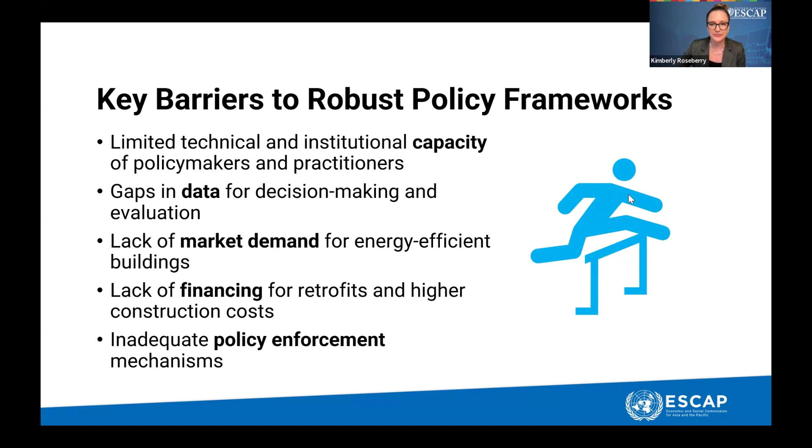Some of the implementation pathways that we see that are particularly important include, first of all, awareness. This is really important as policymakers, practitioners, building occupants, home buyers, etc. must be able to value energy efficiency for the benefits that it delivers, whether it's achievement of national greenhouse gas emission target reductions or lower energy bills in the home. There must be demand for building energy efficiency.

Institutional capacity needs to be improved in order to develop and enforce regulations that are appropriate for the local context. You can't just copy and paste from one context to another. These regulations really need to be tailored to the local context. A long-term perspective on building energy codes is important in order to continuously increase the ambition of the regulations toward the eventual net zero targets. And of course, a key component of these roadmaps for building energy codes includes MRV frameworks.

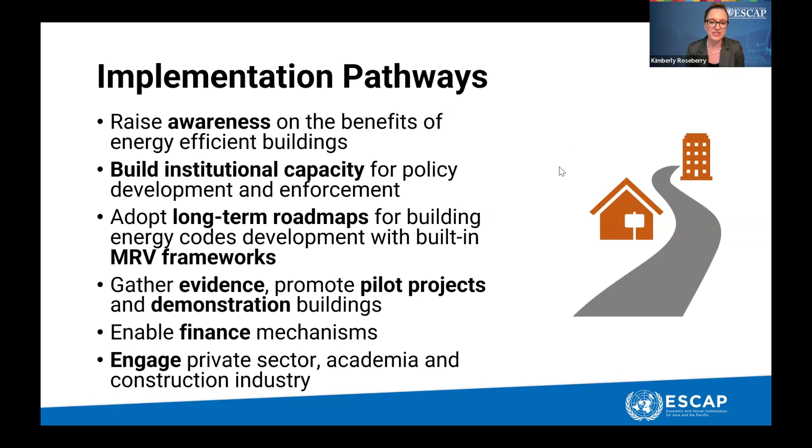Piloting and demonstrating various methods or approaches, design approaches, materials can help raise awareness while also providing data and evidence that can feed into strengthening regulations. Of course, finance mechanisms are important, and lastly, engagement amongst stakeholders, because there are many players that contribute to the realization of energy efficient buildings across private sector, academia, construction industry, as well as government.

When we think about evaluating building sector policies, we need to start with performance baselines. And what we've seen in some contexts where we're working is that those don't actually exist. So there's a real need for energy audits and benchmarking of buildings across different typologies according to their usage, differentiated by climate zones, etc. Really understanding the existing built environment is critical. And then you can get into some modeling of that building stock and begin to understand what the potential impacts are of various regulatory interventions.

Another key component is survey evidence on user behavior and comfort, understanding your market and for the private sector, understanding user behavior. It's possible a building performs really well, but is very uncomfortable to actually live or work in. I think back to the 1970s in the US, where there was a big push during the oil crisis to make buildings energy efficient. So all the windows were shrunk, and there was no daylight in those buildings anymore. Not very comfortable buildings or productive spaces to be in.

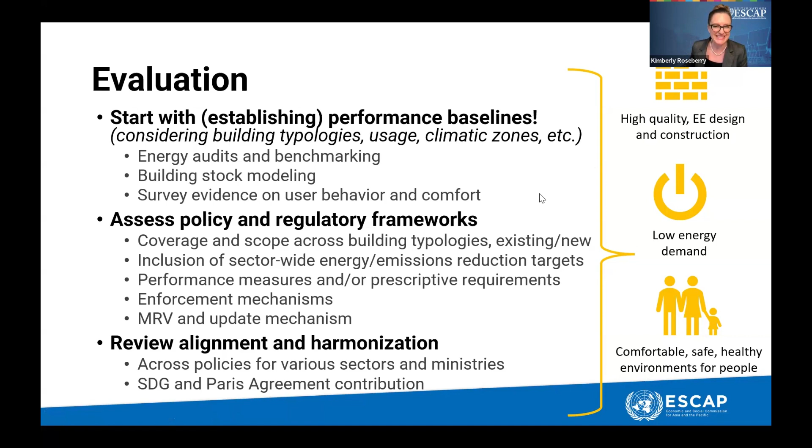So hopefully I have enough time here to go quickly into our Cambodia case.

We're working with the Ministry of Environment there and UNEP as our partners, and we're collaborating on a passive cooling project. In Cambodia, what we see is rising building energy demand, and cooling is really driving that.

The nation has set some targets under its National Energy Efficiency Policy, as well as in its NDCs, on reducing energy demand in this sector, but they still have no building energy codes and no MEPS for appliances yet. These are in the works and are expected to be released soon, but they don't have those basic regulations in place yet. They also have a real lack of an evidence base to inform their regulations, whether it be demonstrations or pilot projects.

There's very few. We are one of those pilot demonstrations, and I'll talk about that quickly.

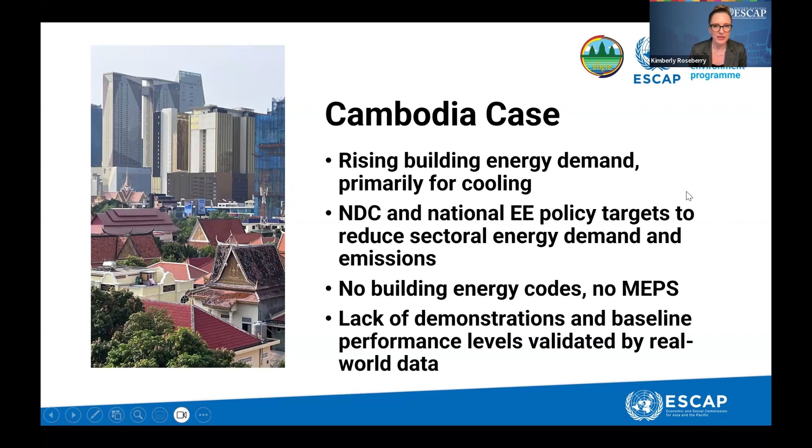But first, in Cambodia, what we really started with was a review and analysis of the built environment, looking at the building typologies, and really modeling out what their performance was based on standard construction practice in the country, and provided an analysis of passive cooling.

When we say passive cooling, we're talking about passive design used in the architectural design and in the construction of the building to reduce the cooling load of those buildings. So looking at that and understanding what the potential is for regulations to improve energy efficiency, reduce energy demand and emissions.

We've developed some very practical tools, first being the compendium. We've really surveyed the materials that are available on the market, the practices that are applicable for the Cambodian context, and pulled them together under this compendium.

We've also created an illustrated guidebook introducing the principles of passive cooling to architects, engineers, and those practitioners who want to integrate passive design into their building projects. These will soon be available on a website that's soon to be launched, and we're excited to put that material out there to the world.

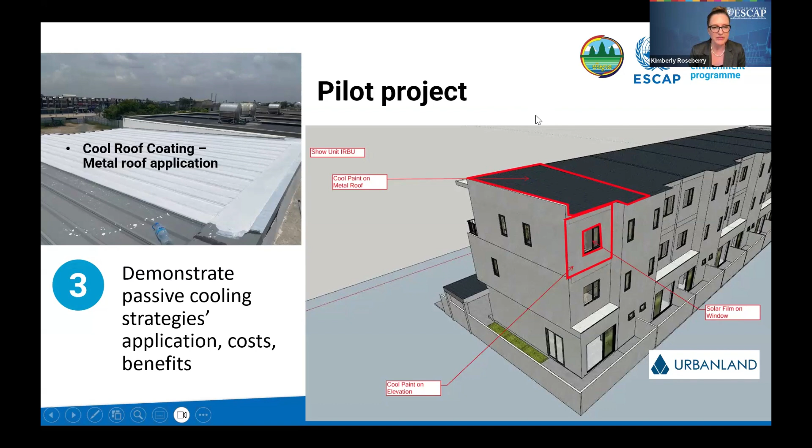to reduce cooling loads. So here you can see cool roof coatings. We've installed monitors and meters to measure the impact, the real world impact of these interventions. By working with a private sector partner, we're really also beginning to capture a lot of information around the practicality of these applications, the cost not only of the materials but of installation, and the benefits of these approaches.

Here's just some more images of that. As I mentioned before, baseline data is critical, and so we have long-term monitoring of the baseline building as well as intervention building to really capture impact.

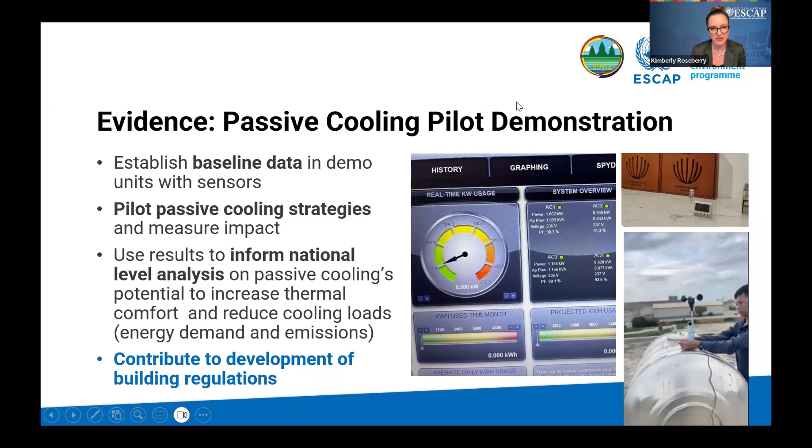Ultimately, what we're looking at is informing national level analysis on the potential of passive design to reduce energy demand and emissions. This data evidence base from across our project will contribute to the development of building regulations in Cambodia. I believe that's it from my side. Thank you so much for your time.

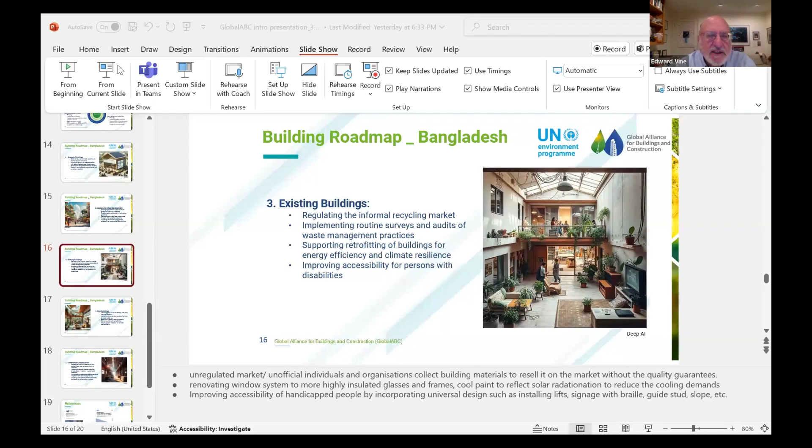So before going on, I would like to introduce the next speaker, Gennai Kamata. He's a technical expert on sustainable buildings in the UN Environment Program. He works for UNEP-led Global Alliance for Buildings and Construction and the UNEP-led Cool Coalition to advocate for energy efficient, resilient buildings. He also coordinates the International Passive Cooling Working Group to promote knowledge exchange on passive design to support enhancing policy, finance mechanisms, and design technologies.

So Gennai, go ahead. Yes, thanks, Edward, and thank you everyone for joining this webinar. I'm really happy to present our work today. My name is Gennai Kamata. I work for UNEP and Global Alliance for Buildings and Construction, or Global ABC, and also the Cool Coalition. Today, I'd like to talk about the Global ABC building roadmap, focusing on Asian context.

Before deep diving into the building roadmap, let me briefly explain Global ABC. This was launched at COP21, hosted by UNEP, and we currently have 339 members, including 68 countries. We are the global platform where all building sectors convene to discuss and share knowledge and best practices, aiming for a common vision of zero emission, efficient, and resilient buildings and construction sectors.

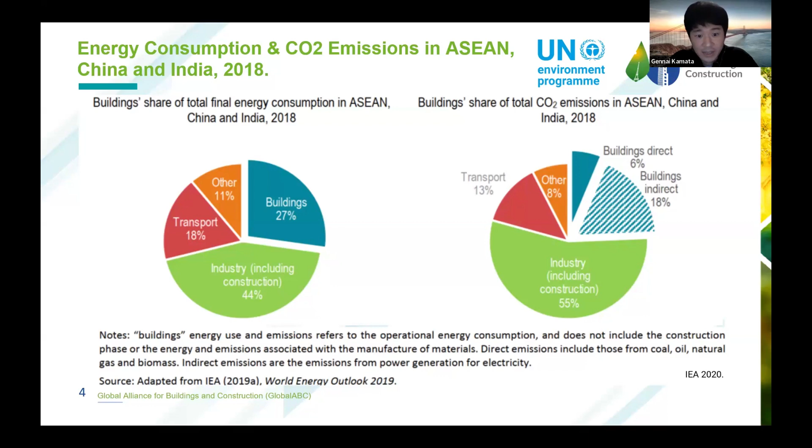Let me talk about the Global ABC Building Roadmap. This is our important publication, developed through consultation with over 700 experts across the world. We need to involve so many experts because building sectors are very fragmented, involving many actors such as developers, architects, engineers, manufacturers, contractors, and building operators. We need to listen to their voices and bring them together around a common vision to achieve building decarbonization.

So this is a guideline for how these players can decarbonize the sector. This Global ABC Roadmap has already been adopted by many countries across the world, especially developing countries.

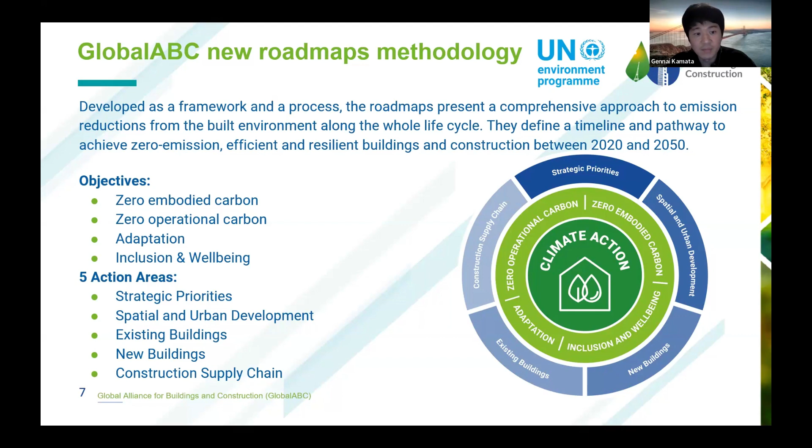This is the Global ABC Roadmap methodology. It was revamped last year, so this is a new methodology capturing the important topics we are lately discussing. In this methodology, countries are encouraged to look at 4 objectives: zero embodied carbon, zero operational carbon, adaptation, and inclusion and well-being. To achieve these objectives, 5 action areas are encouraged: strategic priorities, spatial and urban development, existing buildings, new buildings, and construction supply chain.

This is a little abstract, so in order to efficiently deliver these guidelines, we also prepared a step-by-step guide, which explains how to set goals, identify key actions, and create a pathway towards more efficient, low-carbon, resilient, and inclusive buildings and construction sectors.

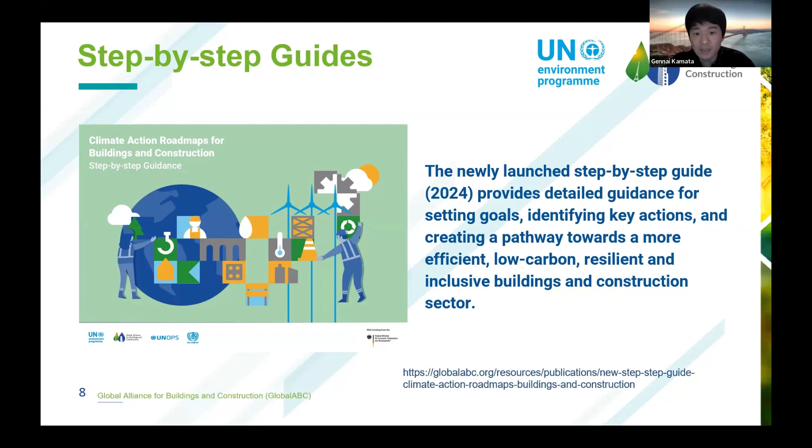We also do a baseline assessment to identify the country's condition in the building sector. Then we identify challenges and opportunities, prioritize domains of change, develop actions, and set up implementation, monitoring, and evaluation.

We also prepared a Gantt chart for countries to understand what they need to do, with what timelines, and by what time they need to engage with whom. This Gantt chart gives countries a more detailed breakdown of the activities they need to do under each step.

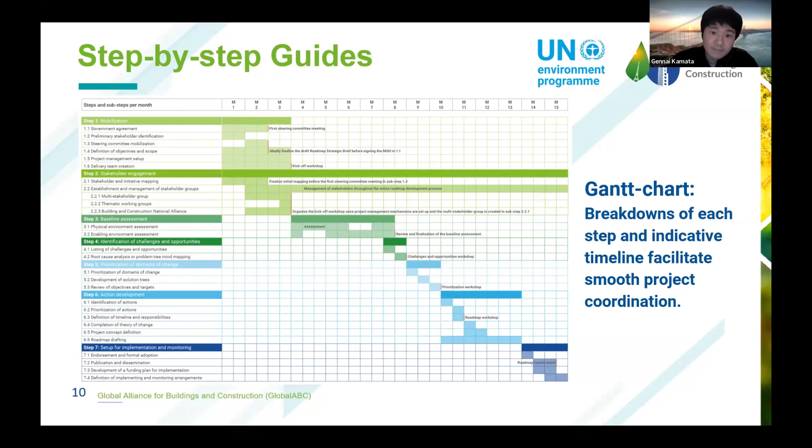When it comes to the evaluations, it's important that we look at the situation from a variety of perspectives, especially for the building sectors.

Basically, I would say we have 5 areas that we need to look at. First of all, technical progress, which is about the energy efficiency of buildings - for example, energy use intensity per square meter, how much it can be reduced from conventional buildings. And also material efficiency, which means how much we can decarbonize the building materials and its production process.

When it comes to policy advancement, we can evaluate whether countries update or develop building codes. In most countries, they already have building codes, but not building energy codes, as Kim mentioned in her slides. Normally those building codes include safety measures such as structural durability and fire safety, but they never talk about energy efficiency and environmental aspects. That's why they need to incorporate that aspect into building codes, regulations, and standards.

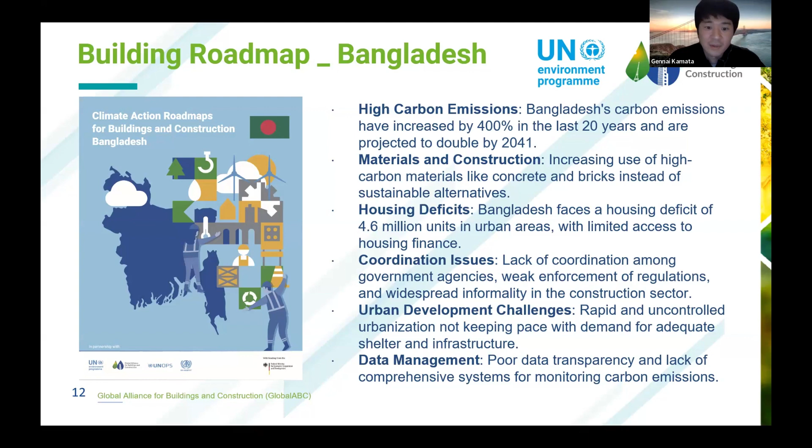Let me quickly talk about an example from Bangladesh, which was just recently published. Bangladesh has lots of issues in the building sector, as described here - high carbon emissions, high intensity materials and construction, housing deficit and coordination issues, and urban development challenges and data management.

Countries are encouraged to use this Global ABC methodology. As I mentioned, there are 4 objectives that countries are encouraged to look at, one being zero embodied carbon. When we look at embodied carbon, we should look at the priority, which is the problem of the countries - for example, material decarbonization needs in bricks, 48%, and concrete, 35%. So a large ratio of materials are not yet low carbon and not green.

In order to reduce this carbon intensity, they created a target like 30% reduction by 2030 and 60% reduction by 2040 from 2020 levels. So all this priority and target needs to be discussed under these 4 objectives, and the same can be applicable to other objectives as well.

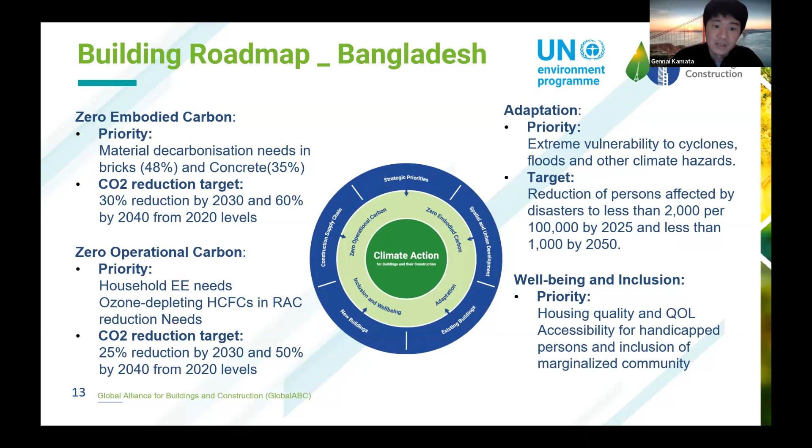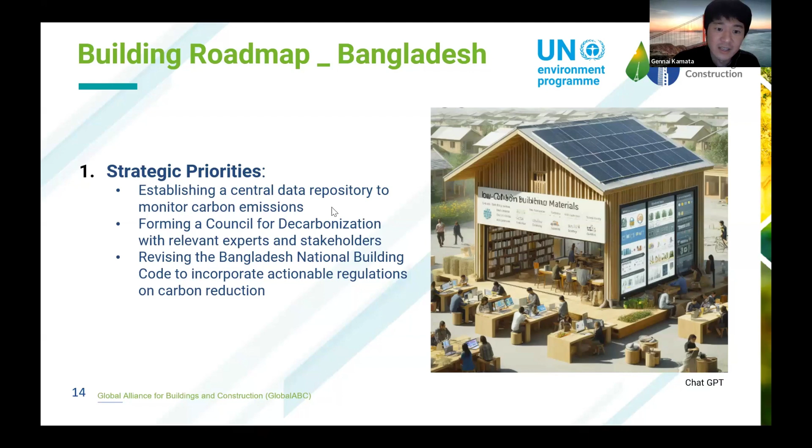Also, in order to achieve these 4 objectives, countries are encouraged to look at what they need to do, like action points. We have 5 action points to look at. For example, for strategic priorities, they identified what they need, such as establishing a data repository.

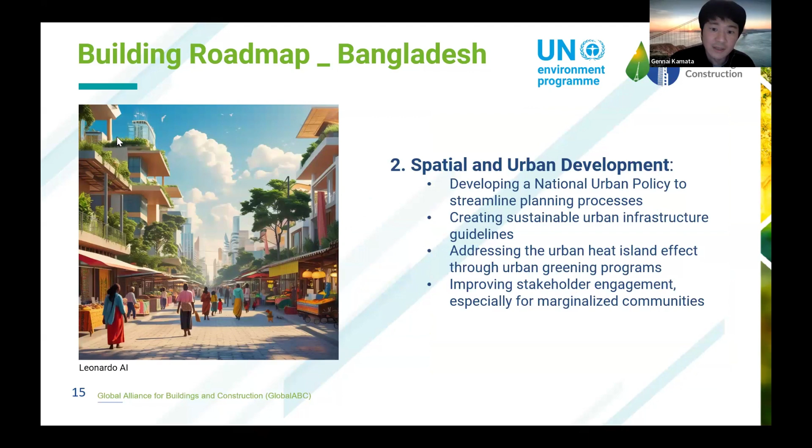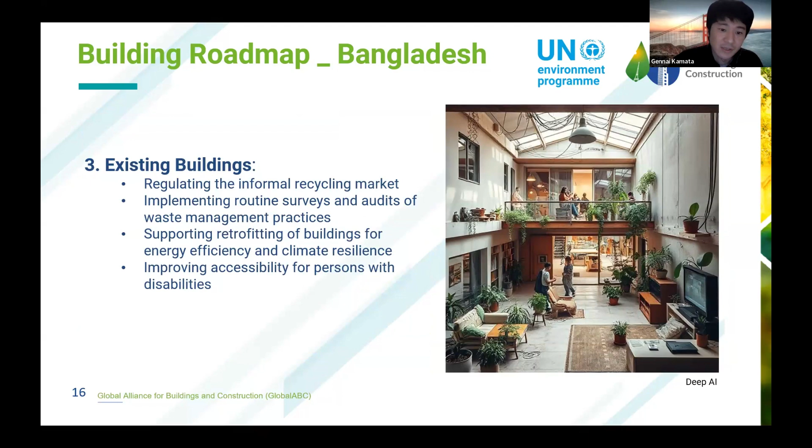Also, if you look at urban development issues, they don't have enough zoning codes and land use regulations, so they need to look at that. And also for existing buildings, there are many uncontrolled recycling markets, unregulated individuals collecting building materials and selling them without quality guarantees. So that is also a problem.

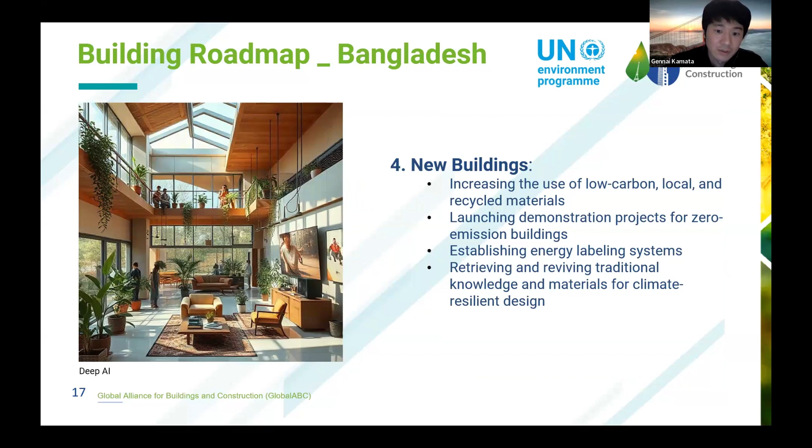And the new buildings, we need to introduce highly insulated window systems and also the materials, and that is actions that they need to take. And also when it comes to the construction supply chains, it's important to look at low carbon materials and its production process.

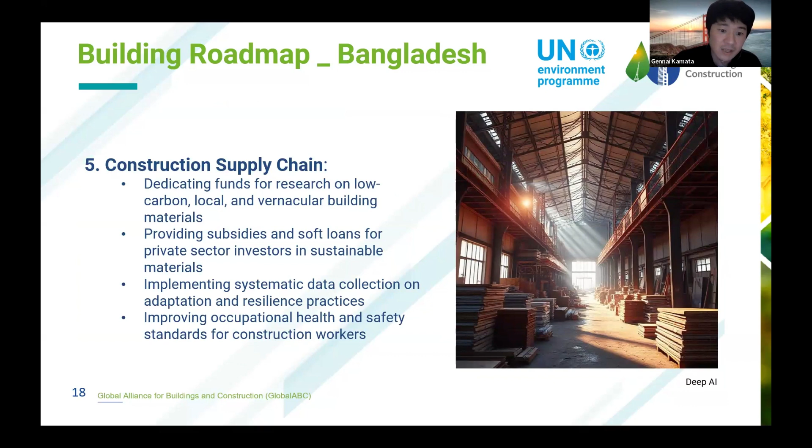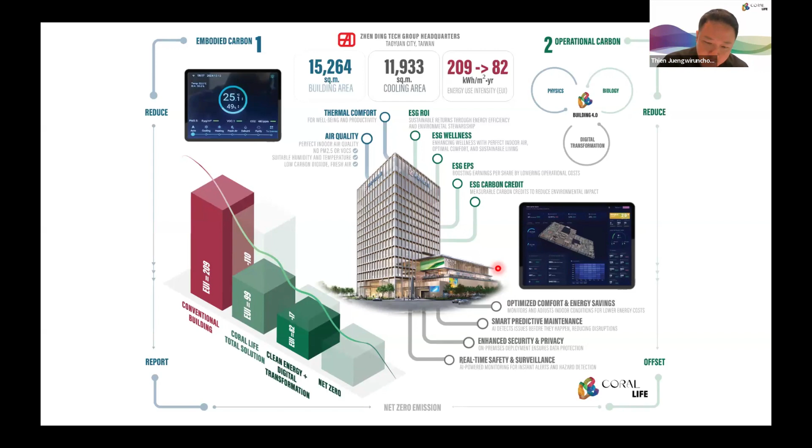And a company that trades globally with some of the largest companies in the world, when they see a solution like this, they're very quick to realize that this is a strong solution.

And here you're looking at a few other buildings as an example that are utilizing our Coral Life Total solution. All of them have energy savings of 60, 70, 80%. And they breathe wellness air, and these are all measurable, tangible ESG solutions. All of our clients are forward-looking, and they look toward measuring and also having real impact in their solutions.

For us, we are a company that is not only product driven, but also focused on smart building solutions, as well as the ability to test and innovate. Coral Life is in essence a combination of all three: a product-driven company, a smart building solutions company, and a technology creation company.

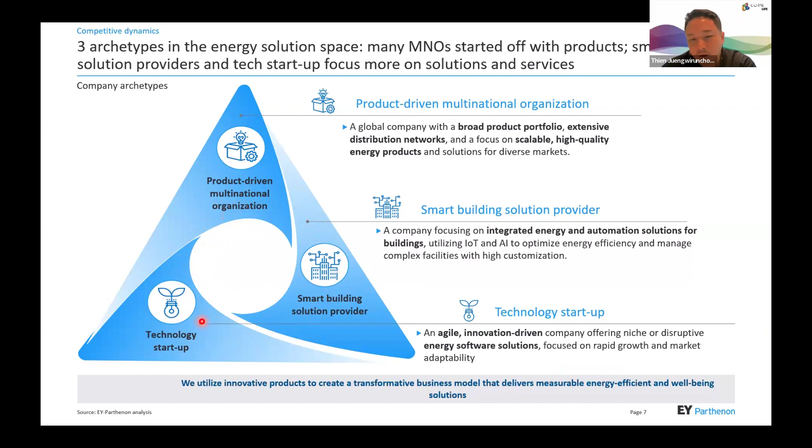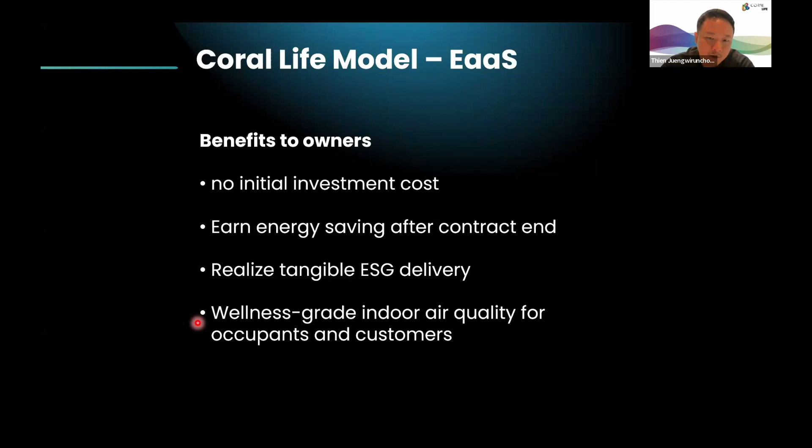We go to market by working with our clients on one of the newest business models, which we call energy as a service. The benefit to owners is that there is no investment cost initially for their capital expenditure, and that old or new buildings are able to earn energy savings after the contract ends and the capital expenditure is repaid. But the tangible ESG delivery is realized right away, along with wellness grade indoor air quality for occupants and customers.

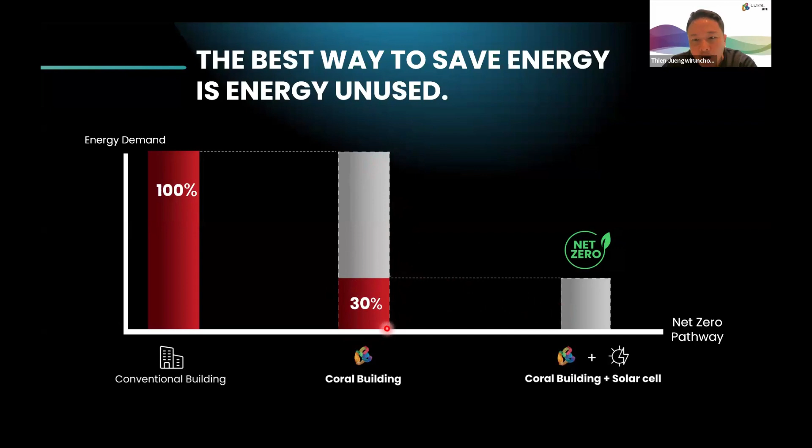The principle is important. We start with a baseline of 100%, and we implement various improvements, whether in building techniques, building materials, mechanics, or digitalization of the buildings. We drop the energy demand of the building from 100 to 30 or less. This is solely on the demand energy part of the building. Then, and only then, do we move on to the energy supply part. Together, both can be combined into a net zero solution.

We talked about measurability and evaluation. The very first thing we do is benchmark the base and then the target. For this, we use EUI, which is kilowatt hour per square meter per year. Regular offices in Thailand average about 300 kilowatt hours per square meter per year. Some of the highest performing buildings in the world, in the US, France, and Singapore, are well below 100 on their EUI index. Our building here in Bangkok is at 68. The key importance of reaching 68 is that this number is reached without solar generation - it reflects solely how efficient a building is at using energy.

Second is indoor air quality. We utilize mechanics that are able to monitor as well as provide data to automate air quality. After we build a building with good EUI, we also address mechanics that are usually quite inefficient or just adequate. Now we have a revolution in how to manage air quality in buildings better.

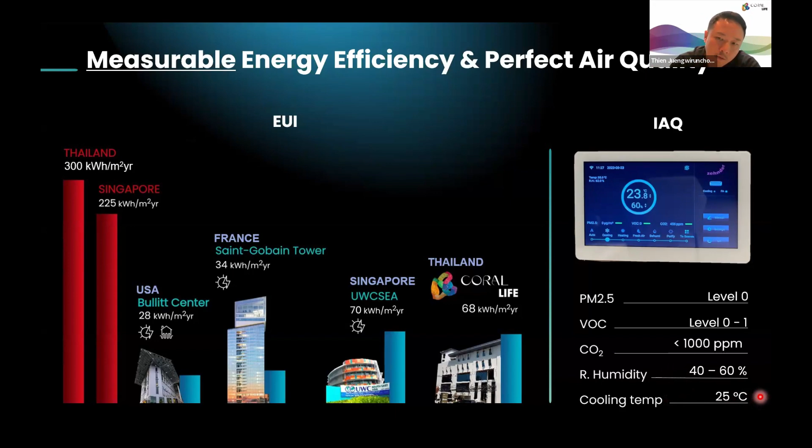In terms of IAQ, it is PM 2.5 to be 0, VOC to be low, carbon dioxide below 1,000 ppm - which is introduced by the WHO as under 1,000 being healthy. Relative humidity, if we're able to control it between 40 and 60%, would suppress mold and bacteria growth, ensuring quality indoor air. And then obviously temperature control. All five of these are how we evaluate and control indoor air quality.

As a test on our clients' buildings as well as our office, we monitor air quality. The result is that the total bacteria count in our space is 53 colony forming units per cubic meter, and the standard is to be below 500 - yet we're only at 53. On total fungi count, the standard should be below 500, and we're at 7.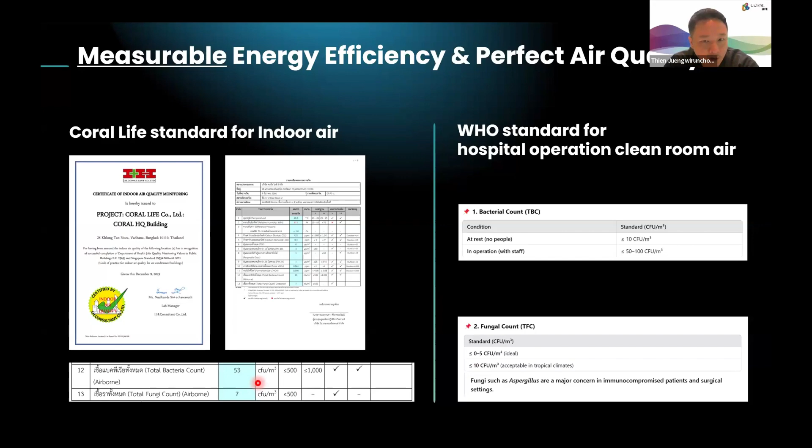How do these numbers compare to the WHO standard? They would fall within hospital operation clean room air standards in all of our space - bacteria count below 100, fungi count in tropical space below 10 - and our numbers satisfy these requirements. The idea of solving biological issues, allergies, and eliminating sickness should not only happen in the hospital; it should be moved to private spaces and public spaces as well.

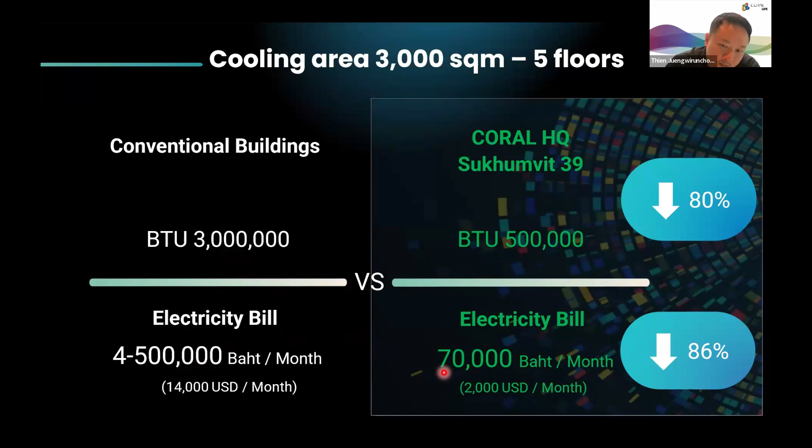Here is a snapshot of our headquarters in Sukhumvit 39, Bangkok, Thailand - a 3,000 square meter cooling space across 5 floors. Conventional design would require 500,000 baht a month in electricity bills for the whole building, but our bill here is 70,000 - an 86% drop from the conventional baseline of a building of similar size and typology.

That's a quick snapshot of our bills. It's really 70,000 baht, about $2,000 a month. That's it for the whole place.

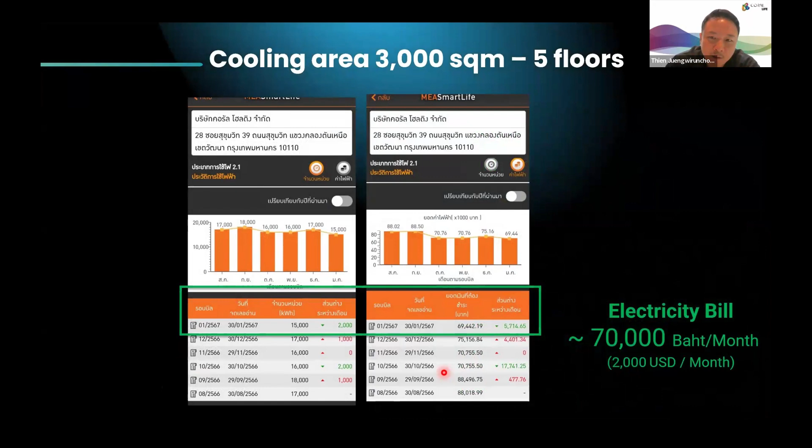On the energy generation side, we currently do not yet have energy generation in our building, but we've calculated that based on how efficient we are as a building, with 900 square meters of roof space, we would be able to have a surplus of 48,000 kilowatt hours per year. That would be revenue of over 130,000 baht per year from selling back to the grid at business rate pricing.

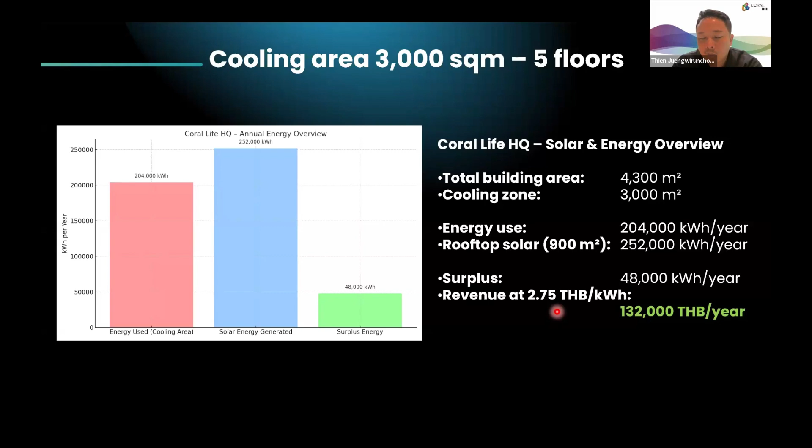Imagine every building in Thailand doing this. These are examples of many of the projects that I understand we have a few minutes left to cover.

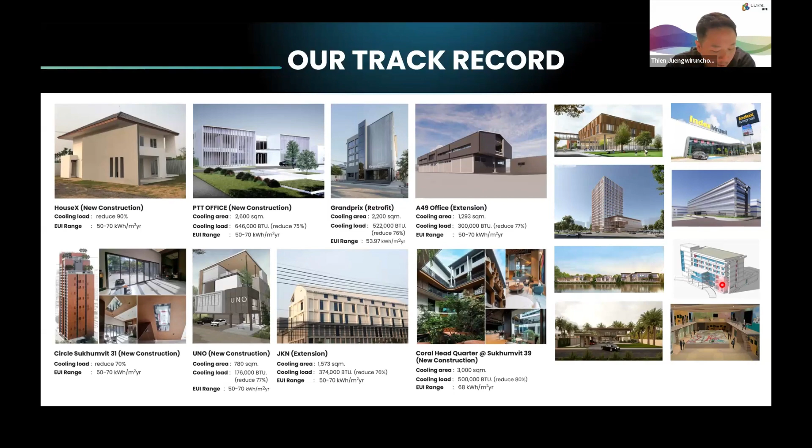All of these buildings utilize ultra energy efficiency as well as hospital grade, wellness grade indoor air, whether they're government buildings, offices, schools, shopping malls, or hospitals. The key is to deliver them with high return on investment. The idea of convincing businesses to adopt is to make sense in terms of monetary calculation, while ensuring high quality indoor living grade. This helps shift thinking from just cost-based to ROI-based adoption, and this is really key.

An example of a building we renovated had its energy cost drop 80%, and it's a winner of the Thailand and ASEAN Energy Award last year on retrofit cases for energy efficiency.

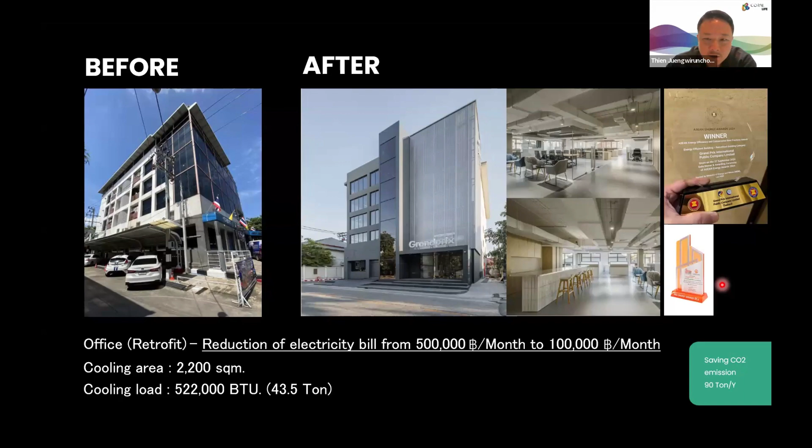To summarize quickly on how we evaluate buildings: on the left of the screen, we tracked monthly and annual utility bills pre and post retrofit, which also includes new construction, to calculate actual savings from baseline. Buildings are benchmarked using EUI to standardize performance comparison. As you've seen earlier, IAQ sensors monitor indoor air metrics and adjust to real-time changes. So if suddenly a lot of people come into the room, carbon dioxide rises, temperature rises, and there will be an adjustment in how our HVAC system works.

Process evaluation is also very important. We conduct interviews and feedback sessions with building owners and users on comfort and air quality, as Kimberly asked me to share a bit more on this. Living comfortably with cost effectiveness, maintenance experience, and satisfaction is very important. We improve end user education on system usage to maximize energy savings, and we optimize tuning of HVAC systems at commissioning and later based on post-occupancy feedback.

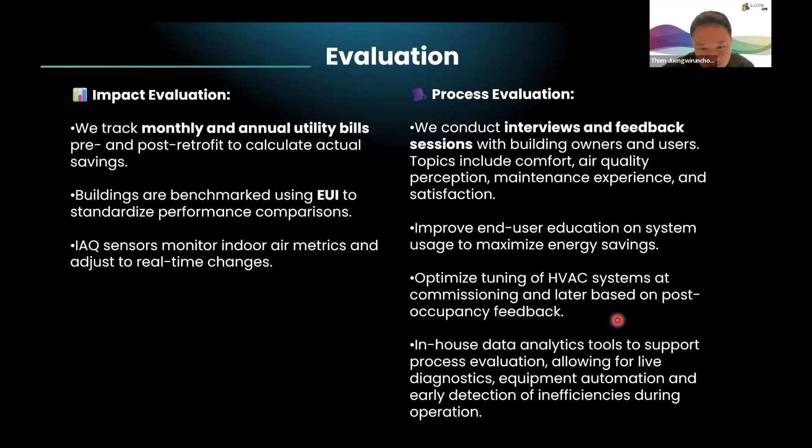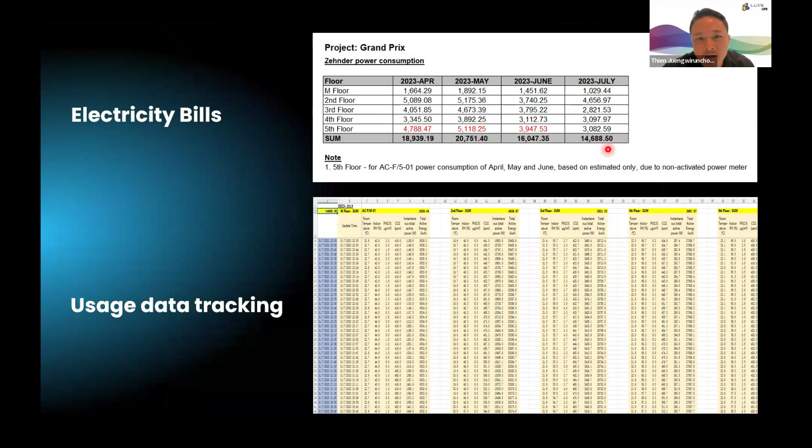As an example, we're able to help our client drop their energy usage even further after the physical building is delivered, through real-time monitoring.

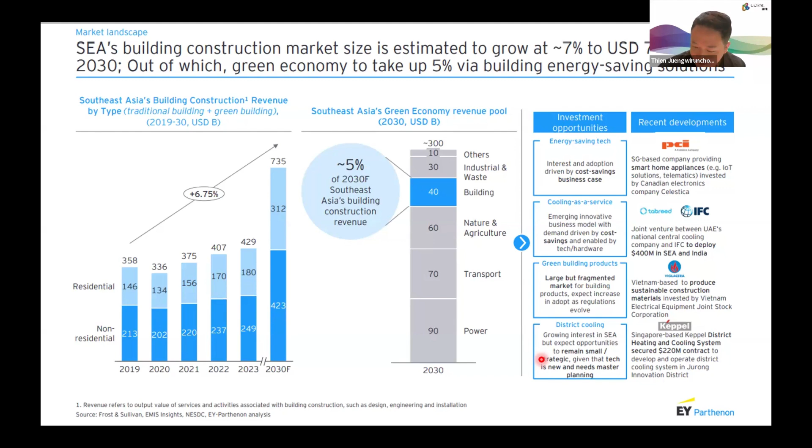As a last slide, we see the market landscape: Southeast Asia's building construction market size is estimated to grow 7% per year to over $735 billion. It's a huge market with opportunities for all kinds of investment, whether in energy saving tech, cooling or energy as a service, green building products, or district cooling—all of that sees an upward trend.

Very good presentation, all three were excellent. We do have some questions in the chat function. I'll start with the first one: a quick question to Janai regarding the dimensions for evaluating progress. When would you say is the right time to conduct evaluations to assess progress in buildings? This could probably apply to all three speakers, but for example, in projects that include policy advisory components for enforcing building codes, what would be the appropriate timing for evaluations after the project's exit to measure the impact of the interventions?

So, Janai—thank you very much for the question. I think there are two stages for evaluation when it comes to the building sector. As I mentioned, we are supporting countries to integrate energy efficiency into their building codes or regulations. Once the countries adopt those energy efficient regulations and codes, it still takes some time for design practitioners to follow the code—it might be a year after the building code is enforced.